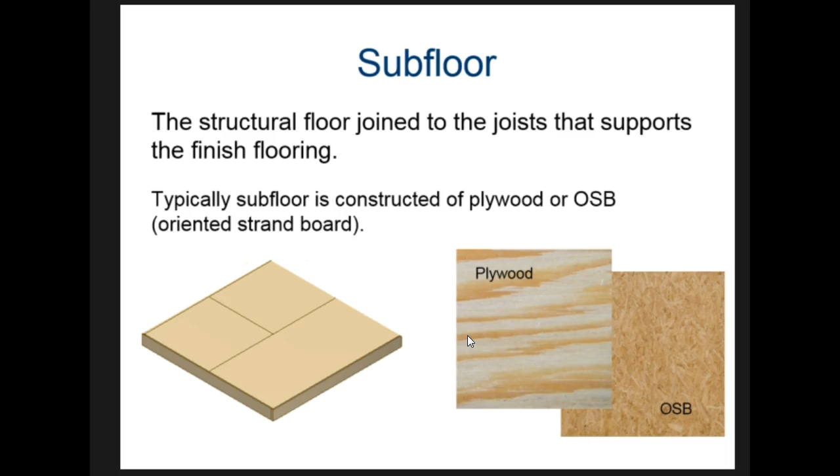These are actually flat sheets, and it looks like this, where there are different layers of the wood that have been cut very thin and pressed together with glue. And this one is actually pieces of wood that have been chopped up and then glued back together. And they're both types of plywood, and they both come in 4-foot by 8-foot sheets. So let's see if we can figure out why these are at 16 or 24.

Well, if we take a second to throw a calculator up here, an 8-foot sheet is 8 feet times 12 inches, which means it's 96 inches long. If I divide that by 24, I get a nice even 4 joists per 8-foot section of floor. If I do the same thing with the 16 inches, I'll see that the 16 inches would give me a nice 6 joists per sheet of the plywood.

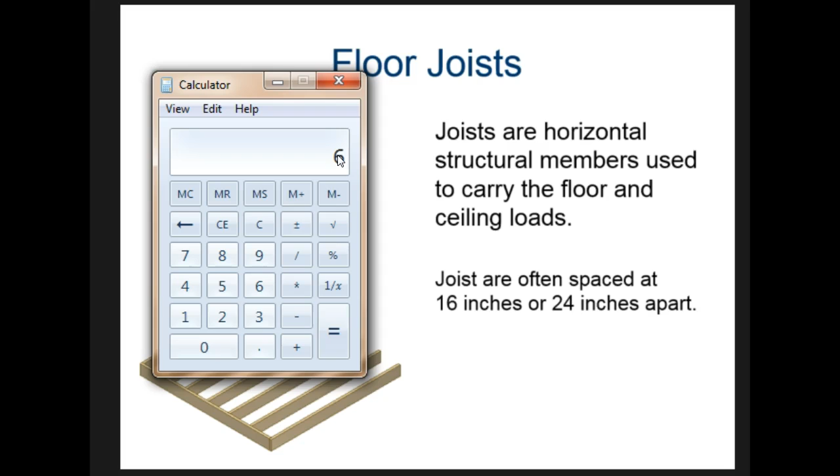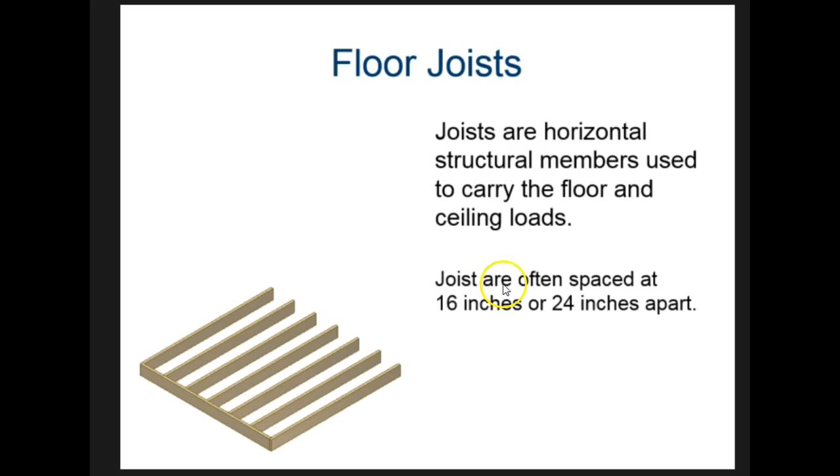That's why we use 16 or 24, because it means that we're going to have a piece of plywood fit very nicely on there and end up on the joist on both ends, and I don't have to cut any off or waste it. That's why it's always 16 or 24. And that's basically how we design all of our walls, floors, roofs, all on the 16 or 24 inches apart measurements. So we have the subfloor above the joists, and then we start building the walls.

Notice that the way they put the walls in is they run a 2x4 like this, and then the rest of them are put in like this. These are actually made when it's laying down, not built standing up. They nail from the bottom up into each of these and from the top down, and then they stand the whole thing up and nail this down into those joists below it.

We call these uprights studs, and they are vertical members in our walls. They're called studs. And they're made out of 2x4s or 2x6s. This refers to 2 inches by 4 inches, but the truth is that a 2x4 is not 2 inches by 4 inches. That's actually the green width and length of the board. Once they dry the wood, it shrinks a little bit, and it's about 1.5 by 3.5, or here 1.5 by 5.5. And those are just standard.

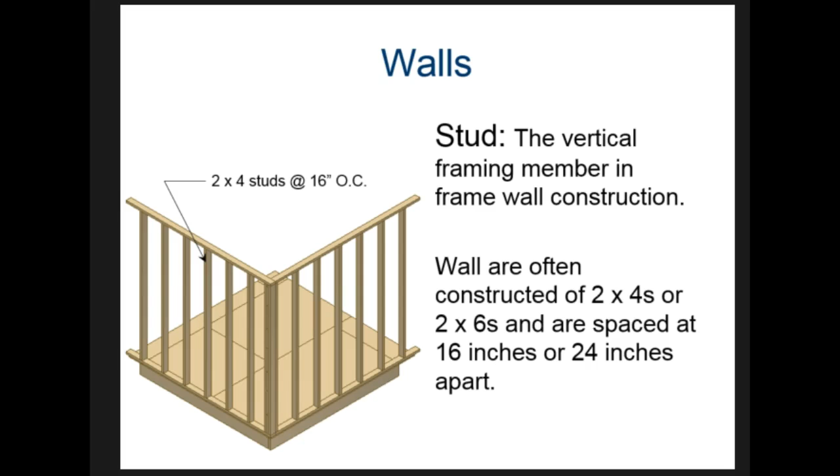Notice 16 or 24 is the same we had before. Here where you see OC, that means on center. What that means is if I start at the center of this board and measure to the center of this board, it'll be 16 inches, or it would be 24 inches if it was another one. So OC means on center. Be sure you write these things down as we go through the notes, because you're going to use it in Revit and everything else we do.

This top board is called the top plate, and often there are 2 boards there. And notice here at the corner that this one is coming in and stops right here, and this one extends over. The one below it would be just the opposite, where this one comes down and this one is stopping short, so that it's double. That's a double top plate when we have 2 different boards at the top there. It makes the wall stronger, and it connects those 2 walls together here at the corner.

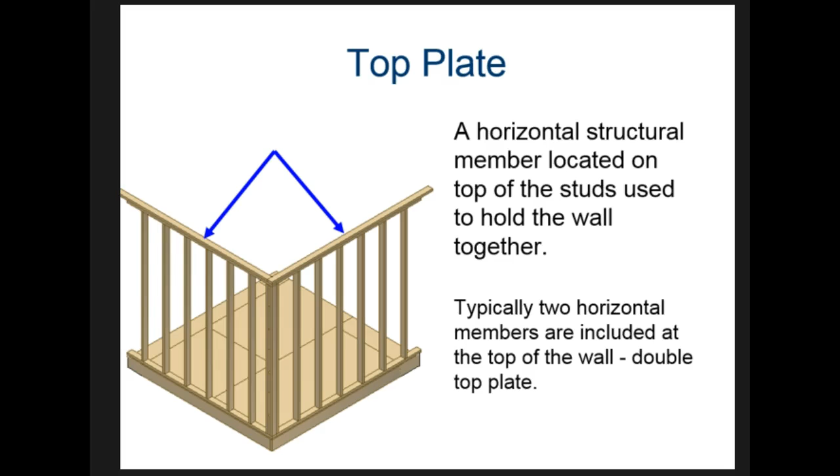The bottom is called the sole plate or the sill plate. A sill, like a window sill, is the bottom. And again, originally this whole wall was built laying down so that the studs were nailed into this, and then it stood up to anchor this onto the floor.

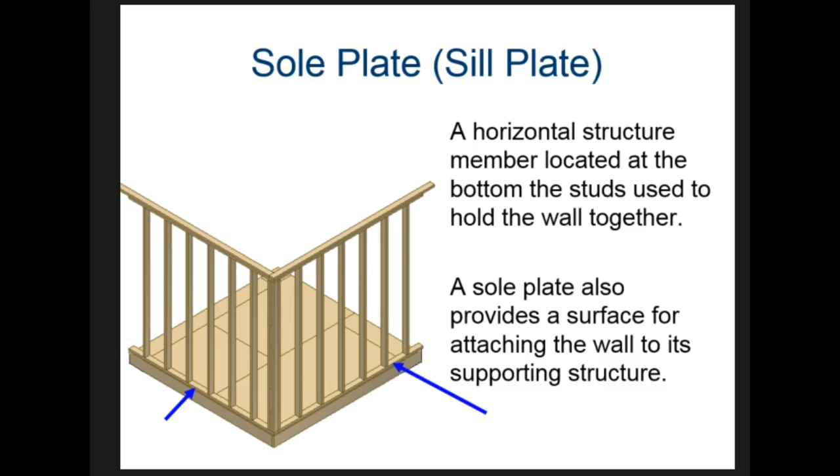If we put a window opening in, this top board is called the header board. And notice that we've cut this stud short here, and this header board is running flat. We have one that's running flat here on top, and then one that's been put in vertical there. That's what's going to support our window, or if we had a door opening.

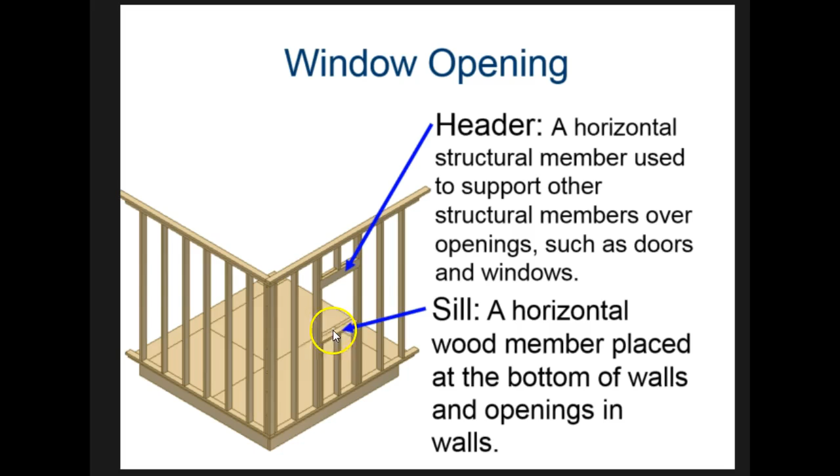The bottom of the window is called the sill. You're probably used to the window sill. And again, it's been put in there with this board below it, and that's what's going to support our window when we put it in.

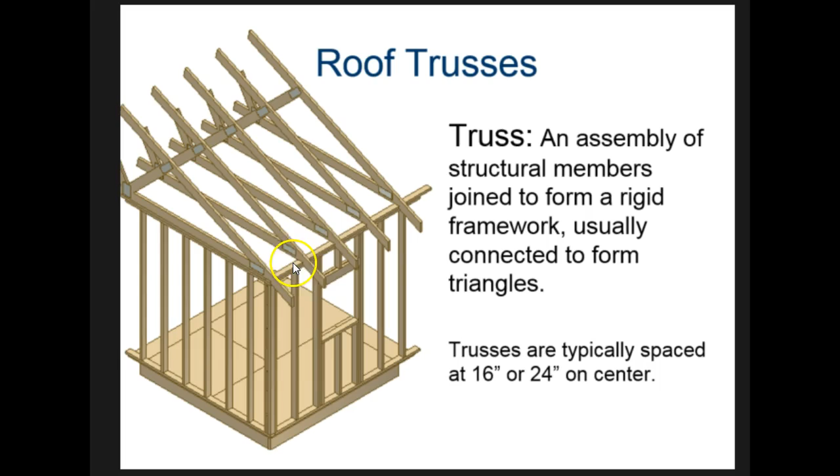On the top, we have trusses. If you're from POE, you're familiar with trusses, but basically most roofs are put together with trusses. And here we can see the triangular shape we see in trusses. We'll talk about trusses a little bit later. Again, these are spaced either 16 or 24 inches apart as well.

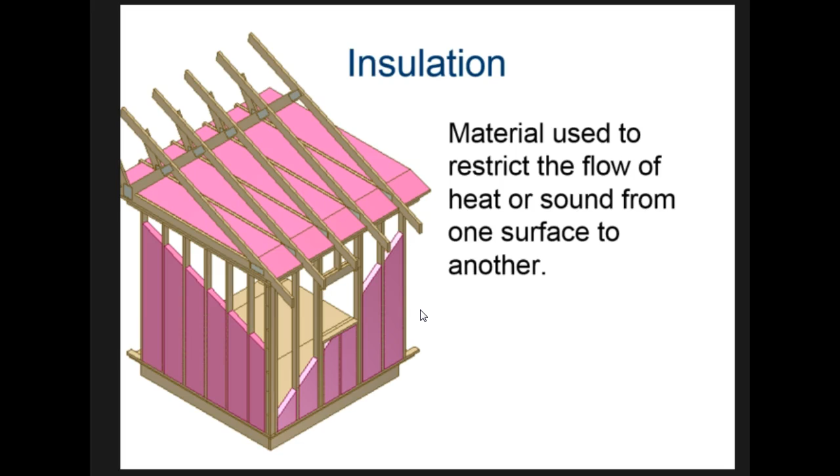In between the studs, we put in insulation, and we'll talk about different kinds of insulation. But basically, it's the insulation that, for us in Texas, keeps the heat out. And for most other parts in the world, they're interested in keeping the heat in during the winter. On top of the insulation, we put a layer of plywood or OSB that we talked about before, and that goes on the walls and the roof.

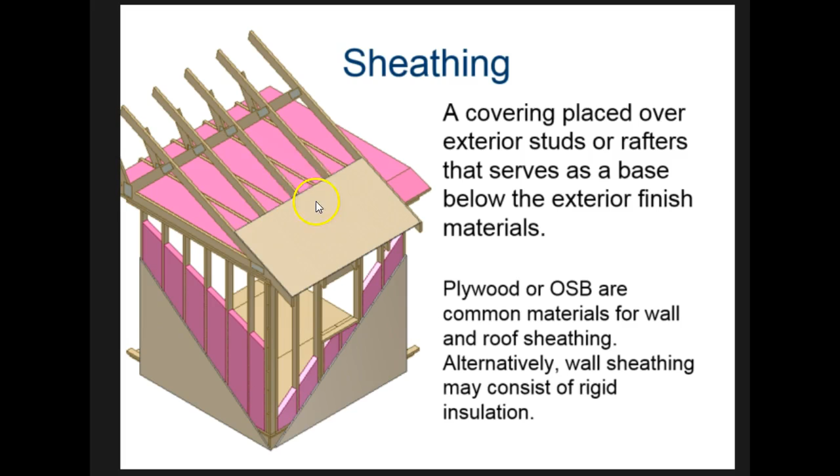On top of that, we have to put a vapor barrier. Basically, this is a thin film that's like plastic. And basically it allows the moisture that's inside your house to get out without allowing moisture outside to get in. If you think about it, there's lots of activities you do inside a house, like washing clothes, washing dishes, taking hot showers, boiling water for coffee or pasta, that creates a lot of water vapor inside the house.

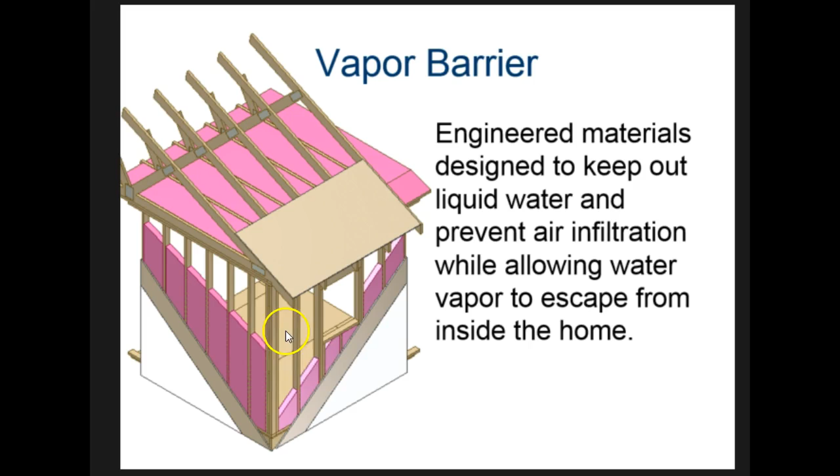If the house didn't allow that vapor to get out, you would end up having mold build up inside your house, and that would be a terrible thing. So this outside layer right here allows the vapor to get out without allowing water to get in from the outside.

Okay, then on top of that, we have some kind of siding. And here we're using siding to mean any surface we're going to put on the outside. Usually it's some kind of pressed board or shingles on the outside. We could also have plywood, hardboard, plastic, vinyl, stucco, brick, stone, whatever we're putting on the very outside of our house.

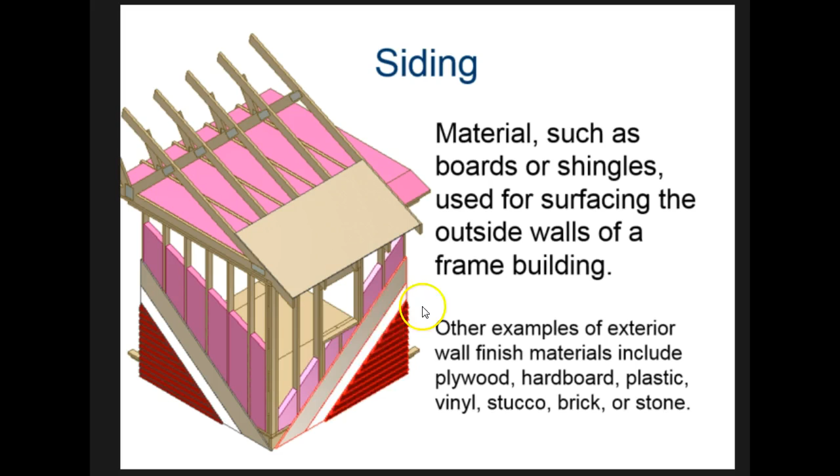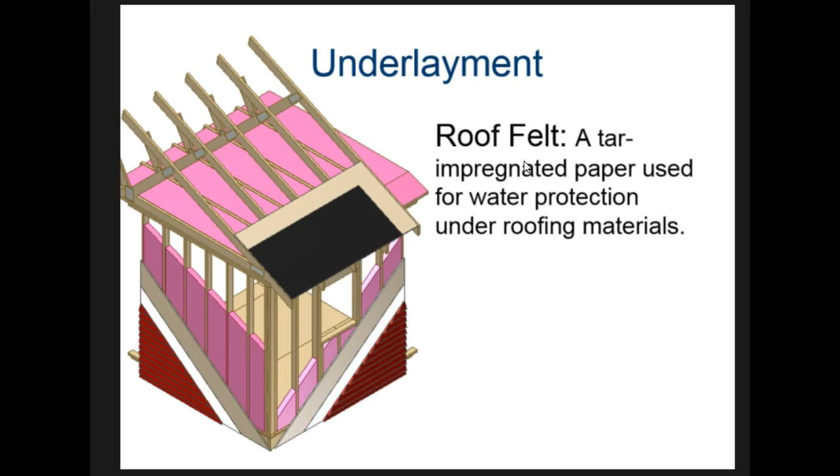On our roof, on top of the plywood, we have a roof felt. It's literally a piece of fabric that has tar that's been put into that fabric. So it's kind of thick and it's waterproof. On top of that roofing tar, we put on the shingles. Around here, most of our shingles are asphalt shingles, so they're asphalt like the road, and they're black with little granules in them.

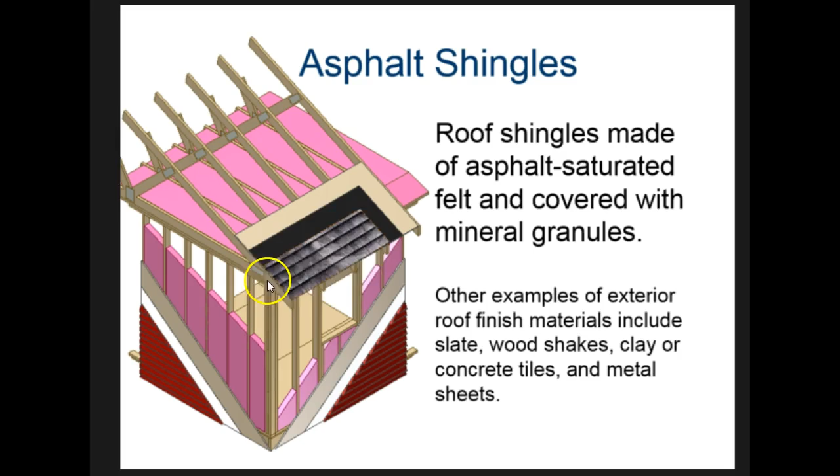But they can also be made out of wood in this area. You also see clay, like on the Spanish houses, or you could have slate. Metal shingles are now becoming pretty popular as well, so the shingles can be made out of a number of different materials. Okay, that's it for our wood framing. Make sure you got all these notes written down.